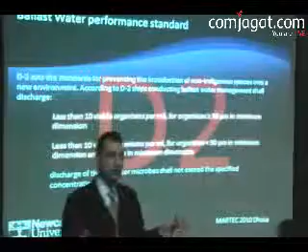I show the regulations. This is the part of the convention, so you can read it in my paper. This sampling is one part of it. This is the regulation. When you take a sample, there are two types of species in the water. One we call zooplankton, the other one we call phytoplankton. I don't think there's any marine biologists in here. Zooplankton are animals, phytoplankton are trees. Animals in the water are called zooplankton, trees or plants in the water are called phytoplankton.

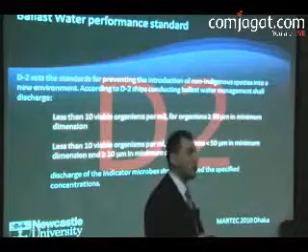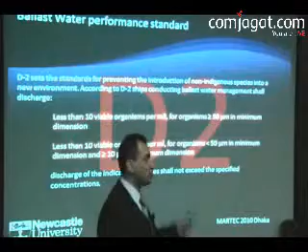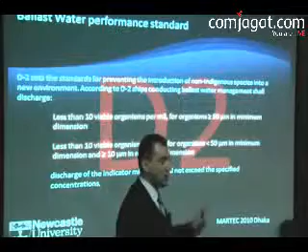Zooplankton are bigger, there should be less than 10 in one ton to comply with the regulation. Phytoplankton are smaller, and there should be 10 in every milliliter. So we can see there are two tens. So if a ship comes to Bangladesh, you take a sample, there are more than 10 zooplankton in 1 ton, and there are more than 10 phytoplankton in 1 milliliter, the ship is guilty, and you can arrest the ship. This is the regulation.

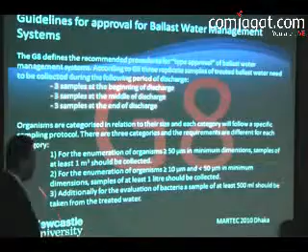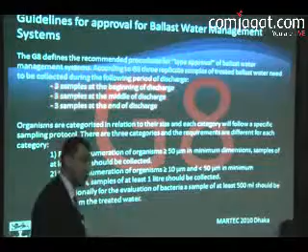This is how the G8, which is for the testing, is advising people to do. You can read about it. This is how systems get type approval. So when you design this system, the system is going to go through type approval with classification. This is in the paper.

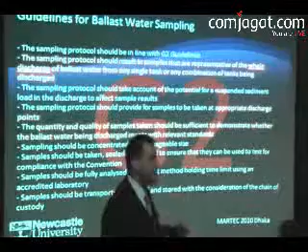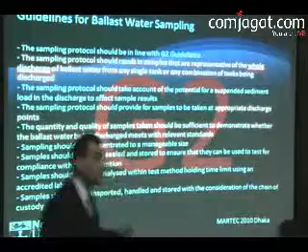One of the elements with G2 is that when you take a sample from the water, it must be representative of the whole discharge. The word whole discharge is there. So you can't go in the tank and take a sample and say you're guilty. Your sampling must be representative of the whole discharge of the ship. 1,000 tons, 5,000 tons, 50,000 tons. It must be representative of the whole sample.

We have a set of environmental standards in the UK, and we have to follow those because this is an environmental issue. And they give us guidelines how to take a sample, and what is the meaning of the representative sample from the whole discharge. If you're interested, you can read that.

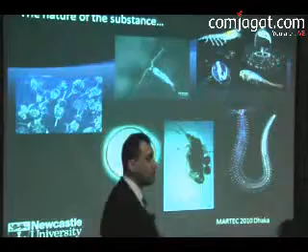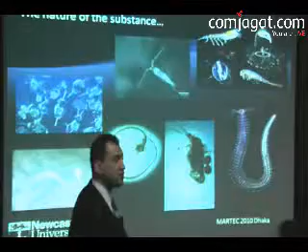But they are also making some other issues associated with that sampling. I don't want to go into the details of that because it is a bit scientific. But the whole issue with this is when you want to take a sample, it is subject to a lot of variability. On board the ship, this is the phytoplankton, this is the phytoplankton, this is the zooplankton, these are zooplankton, and these are zooplankton. So these are the ones who are larger organisms, these are the ones which are the smaller ones. You can also find a fish in your ballast tank. This is my own picture when I went on board the tanker in Dubai.

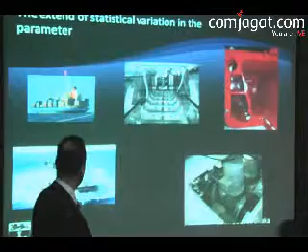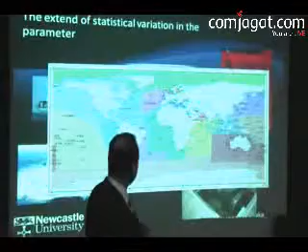Inside the ship, the structure of the ballast tanks are different, type of the ships are different, the size of the tanks are different, and the pumping system is different. So these all add to uncertainty in taking samples from the tanks. Waters around the world are different. Different colors means the species in the water are different. The zooplankton found here are not found in here, and vice versa. So every color represents another set of variability. So if a ship moves from the Middle East to Singapore, or it goes from Middle East to North America, it carries different species to different places.

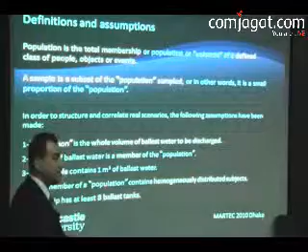Mathematically, we have to come to a solution. What is the representative sampling? We make some assumptions. And in those assumptions, we said every ton of ballast water is one population, and every ship would have 8 ballast tanks, which is not right, but we have to start from somewhere. In my presentation, I have only one equation. This is the equation that the statisticians use. And as Trevor agreed with me, there is an expression that says liars, damn liars, and statisticians. So statisticians are worse than damn liars. So with the numbers, we can do whatever we want to do. But this is the most reliable equation with which we can allocate representativeness.

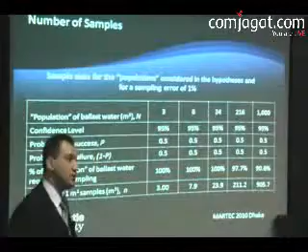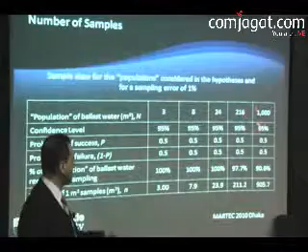This is your ballast tank. I divided it into 3 sections, top, bottom, and the middle, and I divided it into 8 tanks afterwards. And each one of them is divided into 3 sections because the species here, and the species there, and the species there are different. I can further cut them into more pieces and then make it 27. To cut a long story short, if you want to discharge 3 tons and have representative samples, you have to sample 3 tons. If you want to discharge 1,000 tons and have a representative sample, you have to sample 905 tons to be 95% sure what you take a sample of is representative. If you want to discharge 50,000 tons, you have to sample 8,000 tons of water.

So just imagine taking 1 ton of sample takes 25 minutes. So if you want to take 8,000 tons, the ship in your water is going to be there probably for 3.5 months until your sampling is finished. So this is almost impossible. So that is the problem with IMO's regulation, that they are asking you to do something which is practically not possible and statistically wrong. You arrest the ship, and you take 5 samples and take it to the port, the ship can sue you and ask for demurrage. And that is a hefty fine. So do you want to stop the ship to take 8,000 samples? Probably not, because that's going to cost you a lot more.

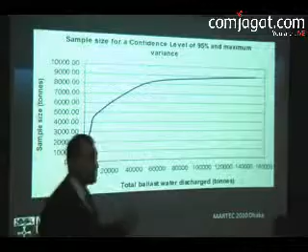This is the same data in the diagram form, and then I'm just referring to the maritime law because we work with a few lawyers and talking about what are the implications, and then you can arrest the chief engineer, you can arrest the captain,